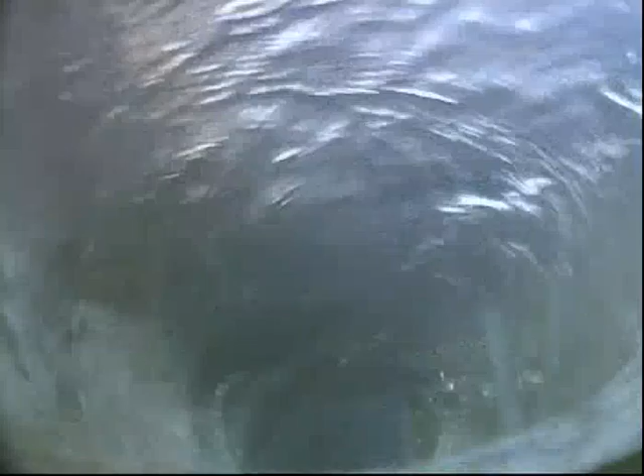Fascination water. No other natural element is so inspiring, mystical, destructive, and healing. At the same time, it's an indispensable source of our survival.

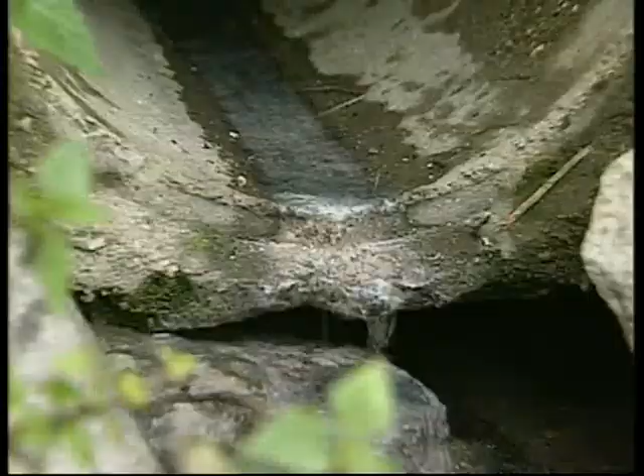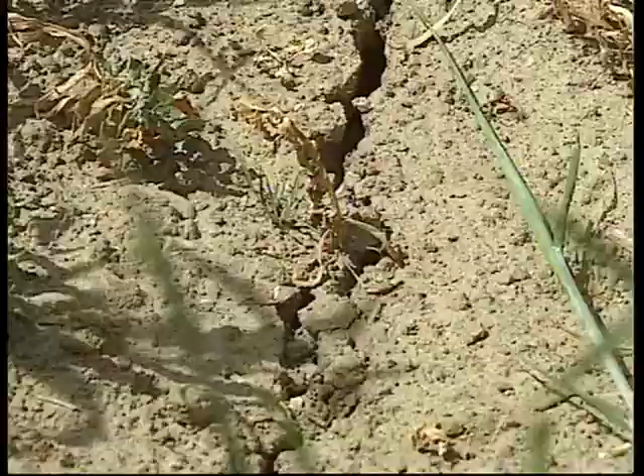Even in apparently water-rich countries such as Germany, the first harbingers of climate change are already recognizable. Dry summers and low precipitation winters have led to a drop in the groundwater table, especially in the northeastern part of Germany.

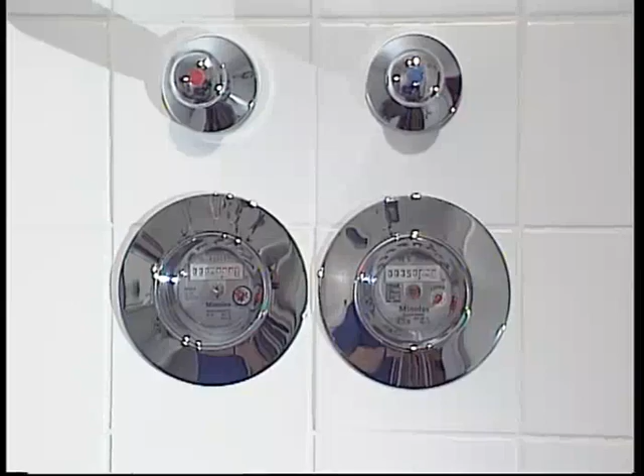Awareness raising aimed at a more conscious and responsible handling of water was needed. The avalanche was set in motion with the water meter. There's hardly a single household where a water meter is not installed, showing accurate drinking water consumption and urging its owner to save water. Dripping water taps are already a thing of the past.

In spite of increasing luxury in the bathroom, an efficient handling of water has become a matter of course for the majority of Germans. The industry reacted hesitantly at the beginning, but later complied with the demand. By using different water-saving fittings, water as well as energy consumption can be reduced almost by half.

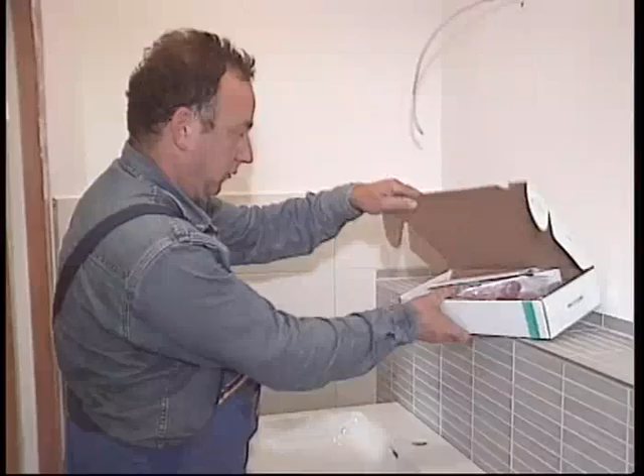Today, more homeowners and investors are becoming aware of this fact, and water-saving fittings are being already installed in new constructions or during the retrofitting of old buildings. Flow restrictors, which deliver only 3 litres per minute, will also achieve a similar effect in old fittings. This investment will pay off after just 1 month.

Water can also be saved during toilet flushing and laundry activities. While washing machines consumed 160 to 180 litres of water in the past, they require less than 50 litres today.

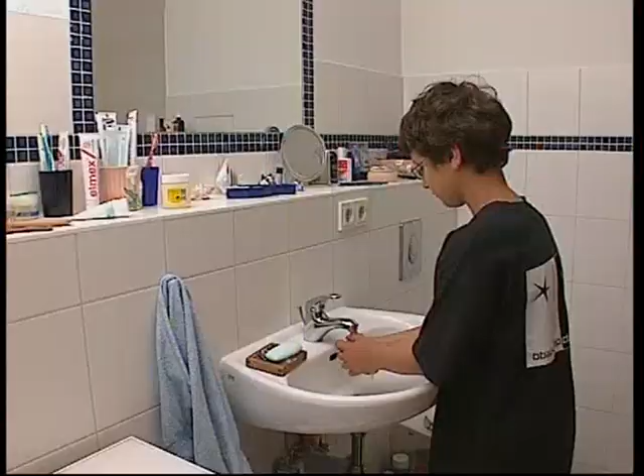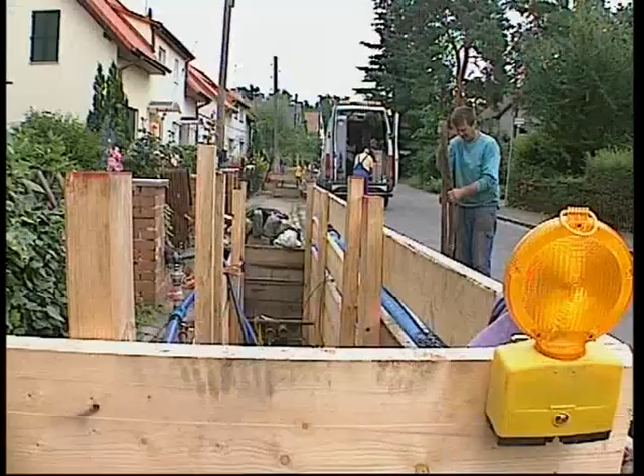At the same time, water and wastewater costs have been increasing by twice as much as energy costs, an ongoing trend. The share of the fixed cost for the infrastructure lies at about 80% of the drinking water and wastewater cost. The largest share of costs will be needed for maintaining and rehabilitating the almost 100-year-old ailing supply networks, for drinking water and especially those for wastewater disposal lines.

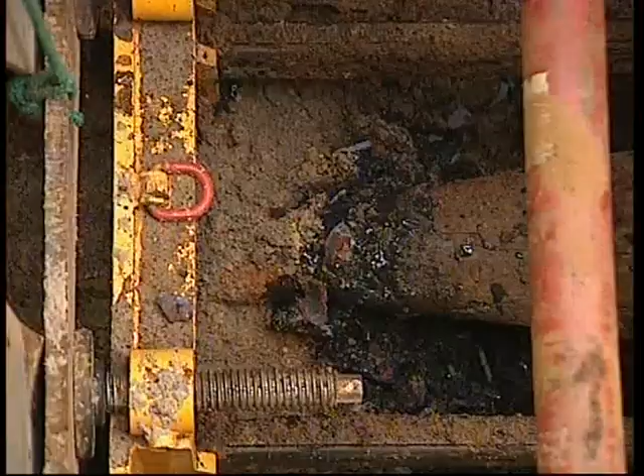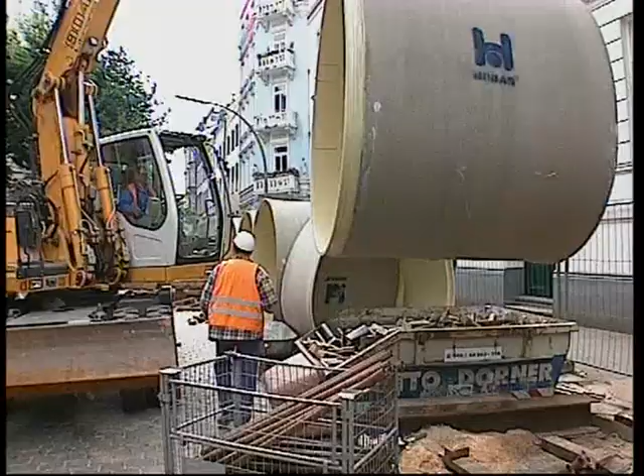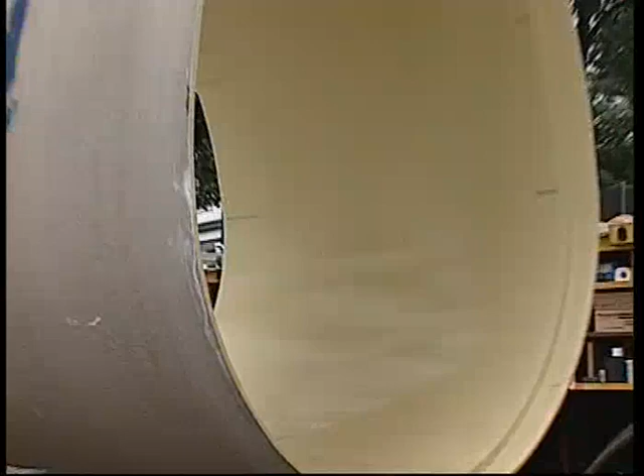Experts estimate the rehabilitation demand for the coming years, especially for the sewerage system, at 50 to 60,000 million euros. This corresponds approximately to the value of the gold reserves in Germany's central bank, funds which many of the municipal water companies don't possess. Furthermore, these centralized systems are not flexible enough to deal with the rapid population change.

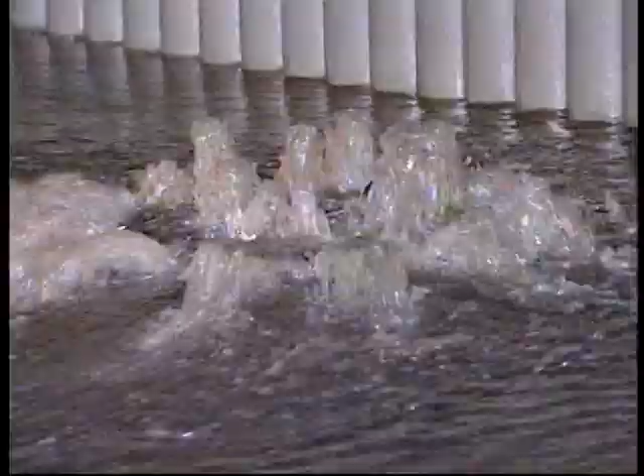In addition, there are problems related to incipient climate change. For example, more frequent precipitation has resulted in floods in recent years. On top of everything, an increasing number of torrential rain events invariably caused major problems to the German combined sewerage system, into which rainwater and wastewater flow together, so that a fraction of the rainwater-wastewater mixture flows untreated into rivers and lakes following heavy rain showers.

Fish die as a result of oxygen depletion in water bodies due to bacterial decomposition of the wastewater components. Bathing sites and lakes often have to be shut down in summer due to high microbial load. On the other hand, exceptionally long dry periods hinder groundwater recharge and have fatal consequences on forestry and agriculture.

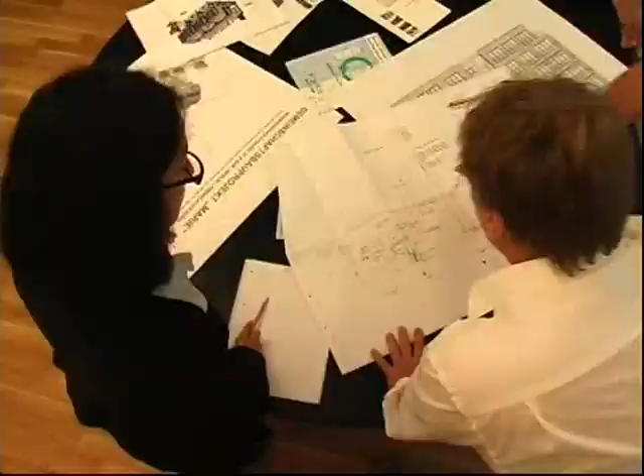Also in Germany, there are already regions with deficient amounts of water. Local authorities, planners, architects and engineers need to work together to implement new decentralized water concepts. These are more economical and above all more adaptable to climate and population fluctuations, closing eventually the water cycle.

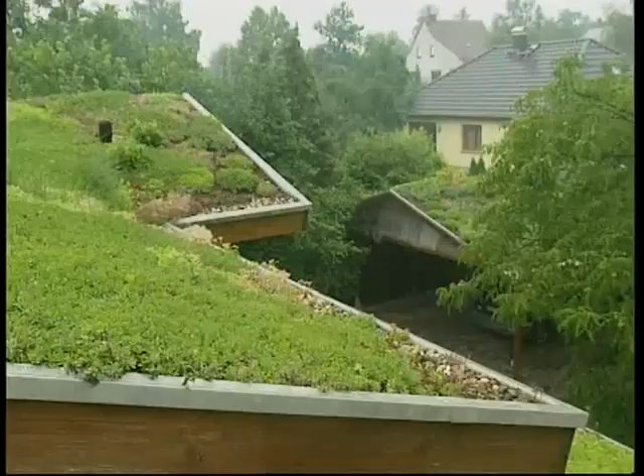Rainwater can be simply utilized by means of evaporation or infiltration on site, relieving at the same time the strain on the municipal sewer. Green roofs in housing settlements in rural areas or in urban multi-storey buildings offer excellent options for rainwater management.

Various types of grass planted in the inner courtyards between paving stones instead of concrete surfaces are also suitable. Or even storage reservoirs which collect roof runoffs. Runoffs can also drain in constructed wetlands, as seen here in the middle of a city of 1 million. Or, upon heavy rain, runoffs can seep into the underground via an adjacent vegetated swale. Recently, scientists have continuously shown the high value of such measures for the microclimate, especially in large cities.

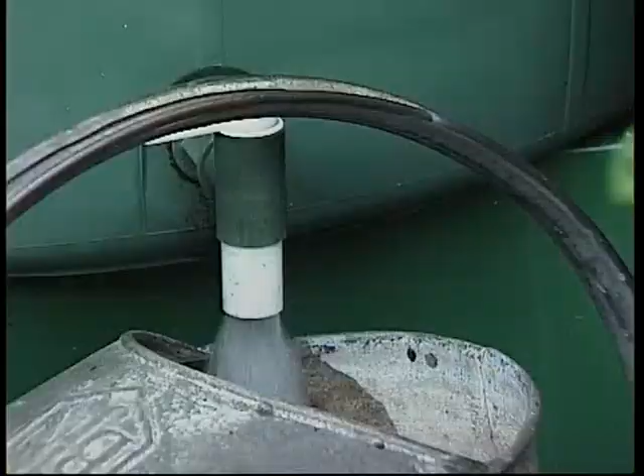The good old rainwater barrel has also been rediscovered as a water reservoir for the garden. Also, surface runoffs can be used directly to water the flower bed.

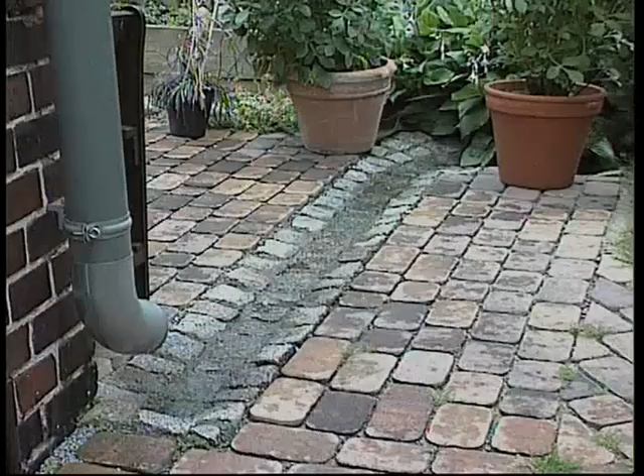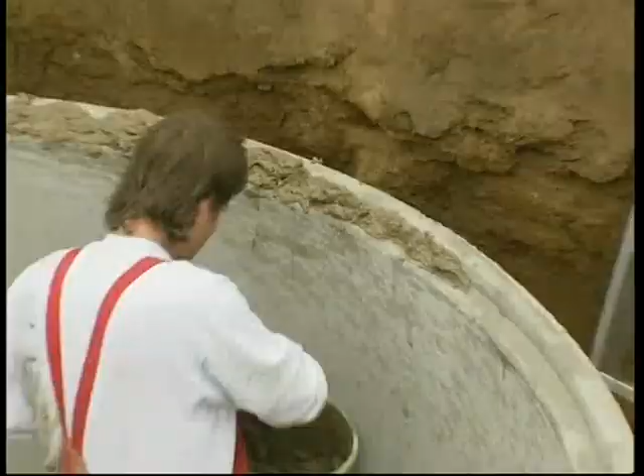On a larger scale, there are several modern technologies which can help increase the rainwater potential. In Germany, about 50 to 60,000 rainwater cisterns are built yearly, either from concrete or plastic, and the trend is upwards.

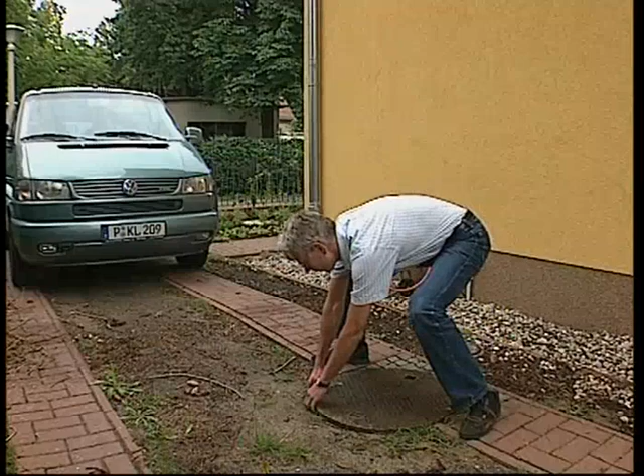The Darker family deliberately implemented rainwater utilization in its 3-generation house in Potsdam. Roof runoff drains directly into the 6,000-litre cistern. A storage capacity of about 700 to 800 litres is calculated per person. A filter, which is easy to clean, retains the coarse solids in rainwater.

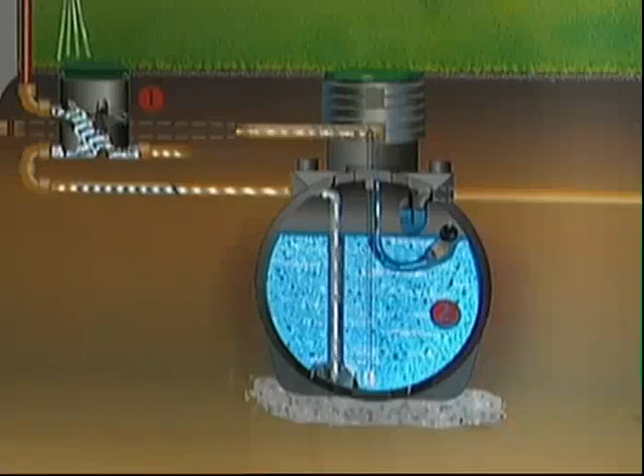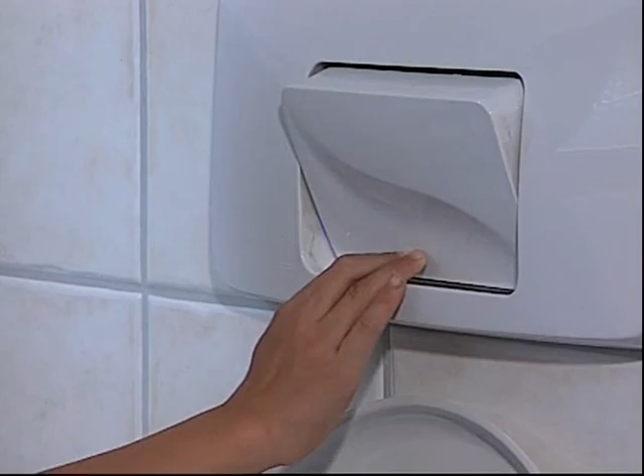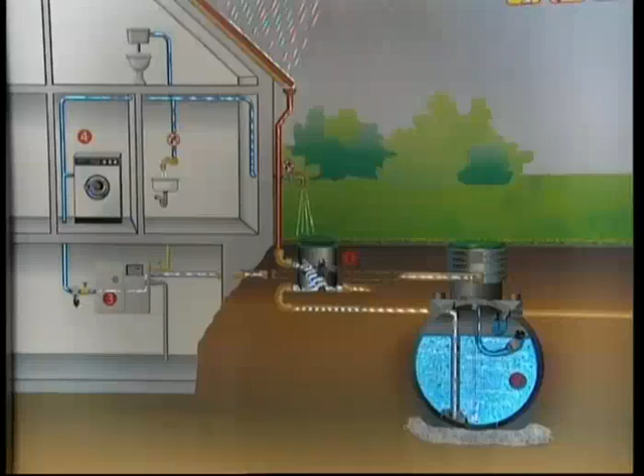Rainwater is withdrawn from the cistern over a separate second network, by means of automatic control, to the different floors for use in toilet flushing, laundry, and garden watering.

We have no concerns as to the presence of any residues in rainwater, or whether it is not clean enough for laundry. During dry periods, we turn off the washing machine and use rainwater only for toilet flushing or to water the garden.

The Darker's rainwater system will pay for itself within 5 to 6 years. Eventually, a third of the yearly total drinking water and wastewater costs can be saved through rainwater utilization.

For the Hamburg Hotel Ausspann, rainwater utilization has already paid off. The architect and hotel owner constructed a collection tank in a vacant room inside the building, between the stairs and the guest rooms.

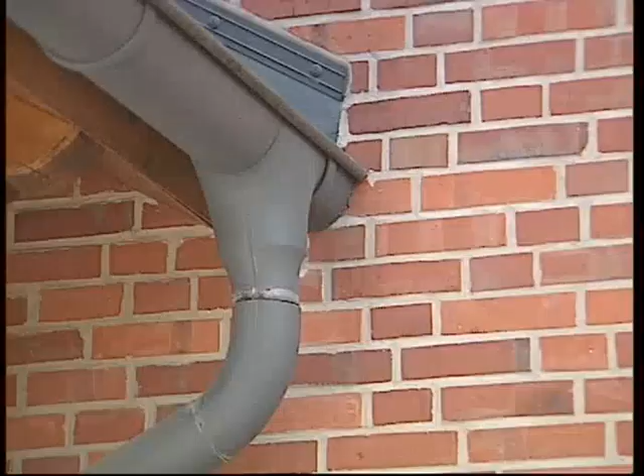It works for 13 years, and we have already collected about 4,000 cubic meters of rainwater. We mainly use it to flush the toilets of 40 water closets connected to the system.

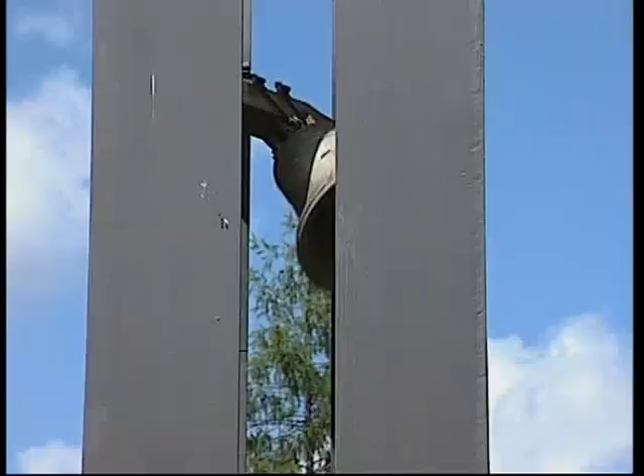Great benefits have been achieved in other projects in Berlin, such as that of the Franciscan monastery, where laundry for the charity shop is washed with rainwater. This is profitable, since the wash water can be treated again and used for toilet flushing.

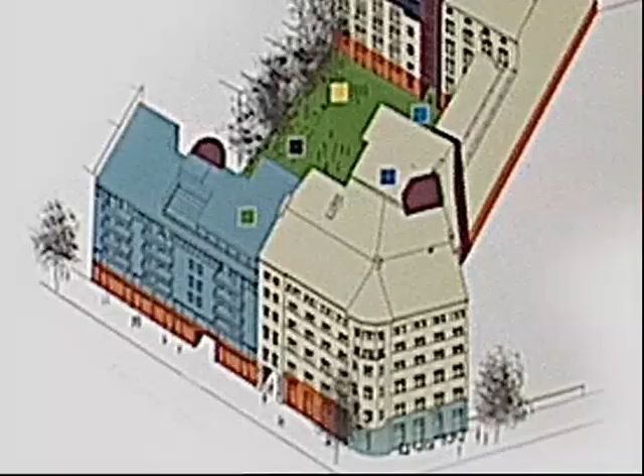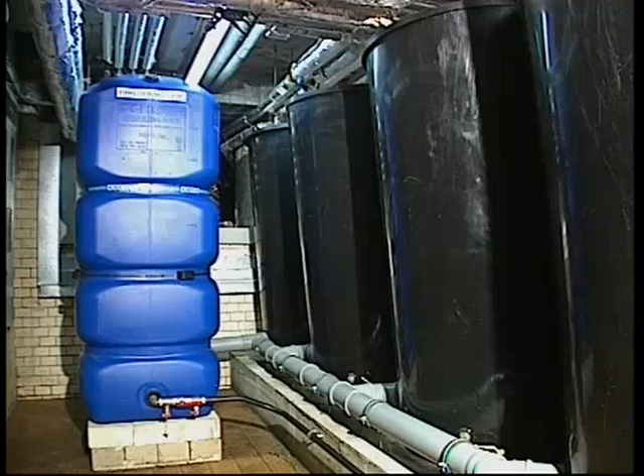This is the Weiberwirtschaft, a business complex for women in the centre of Berlin. Here, 3 rainwater plants store up to 80% of the rainwater for use in toilet flushing in the different trades, including a tailor's shop, glazier's workshop and a restaurant.

These projects have achieved that new effective technologies were developed and tested in Germany. We also developed guidelines for construction, planning, operation and maintenance of these plants. Our technologies have also proved to be of value worldwide.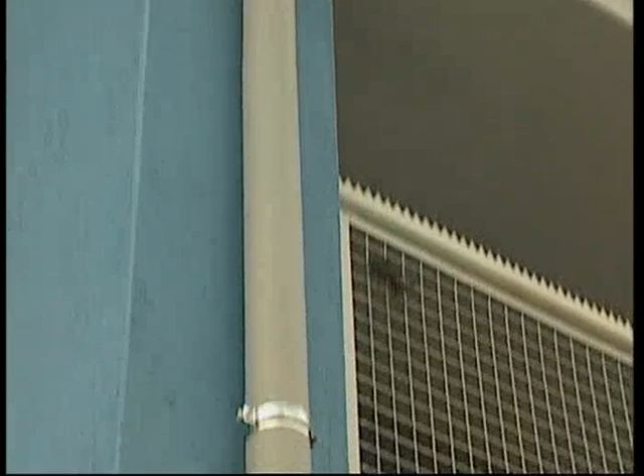Another famous water-saving project is that of the Technology Centre of the Fire Brigade in Hamburg. Rainwater from the flat roof flows through downpipes into which filters are integrated, and drains into plastic tanks placed in the cellar. From there, rainwater flows by means of centrifugal pumps into a washing plant.

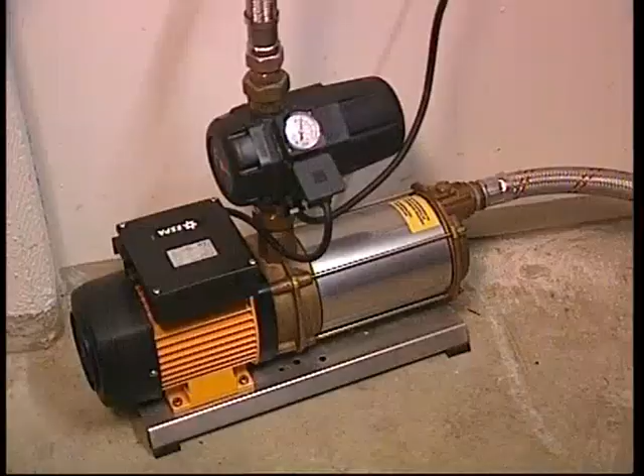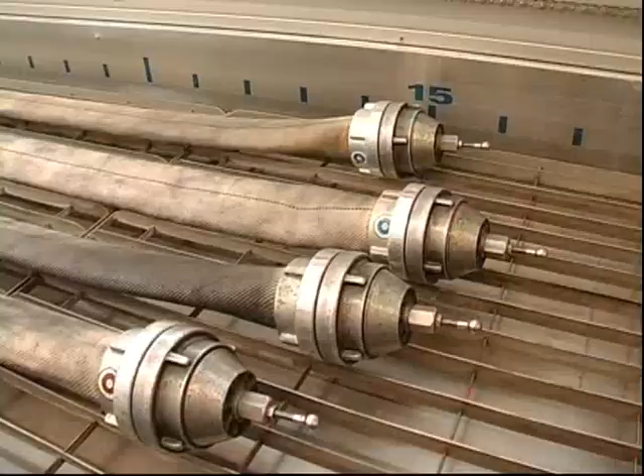Here, all the fire hoses of the Hanseatic city are cleaned regularly. 4 fire hoses can be cleaned within 20 minutes, including drying and a pressure test.

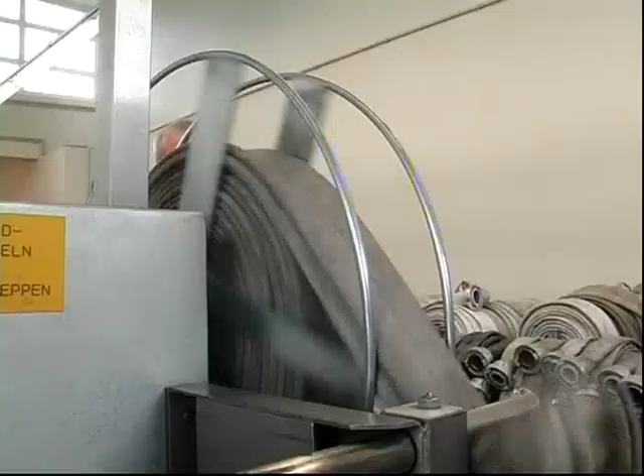The yearly water bill of €13,000 uncovered the largest water consumer of the centre after a comprehensive examination. Up to 500 cubic metres of drinking water can be saved yearly through rainwater utilisation, thus reducing running costs.

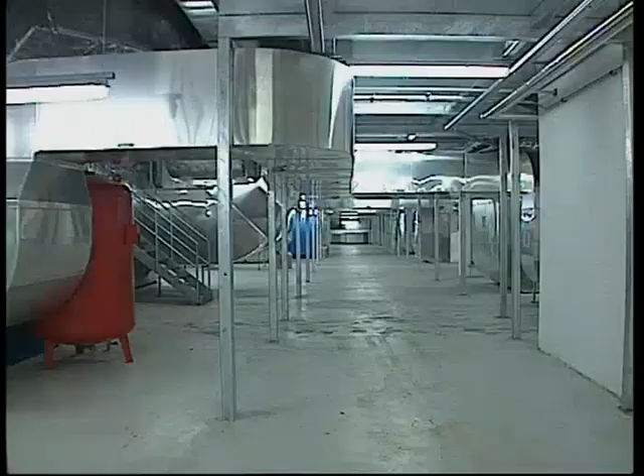Even more rainwater can be collected from the roof of the Hamburg airport, which is stored in an underground reservoir 12 metres below the surface, behind the central ventilation system. From there, rainwater is pumped to all airport toilets.

We feel ourselves committed to conserve these resources, and this has been the major driving force. And of course, after a rough calculation, it was clear to us that this would turn out to be profitable. €22,000 can be saved yearly using rainwater.

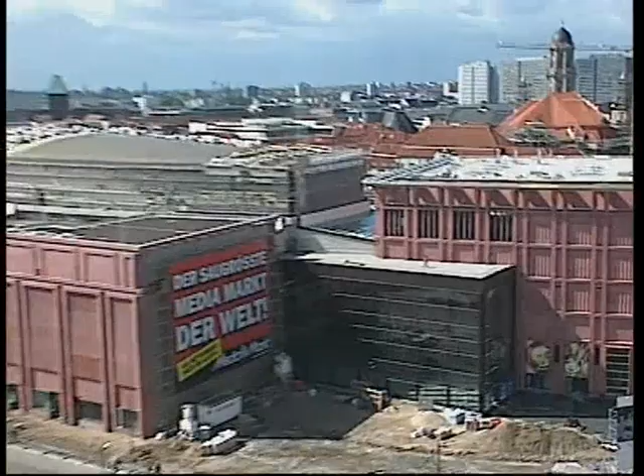Therefore, in almost all modern large airports in Germany, these water reserves are being tapped. Also, renowned shopping centres are increasingly resorting to rainwater utilisation as a substitute for drinking water.

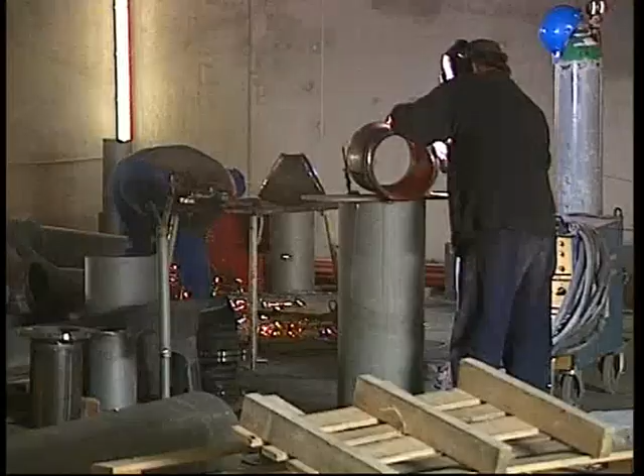A current example is Alexa of Sonae Sierra in Berlin, which is still under construction. The firm is internationally recognised as a specialist in shopping centres and owns 44 of them in Europe alone. It's also well known for its environmentally friendly design, operation and management. A short visit to the future rainwater reservoirs.

We are able to collect about 1,050 cubic meters of rainwater with the 2 reservoirs. We will primarily use this water for cooling, to feed the air conditioning system which we have installed in the shopping center.

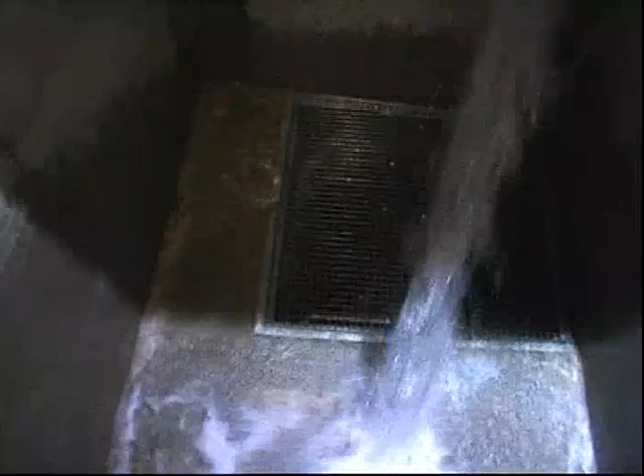The concrete basins will be eventually flooded. The stored rainwater is also connected to a sprinkler system and can be immediately used as reserve water for firefighting.

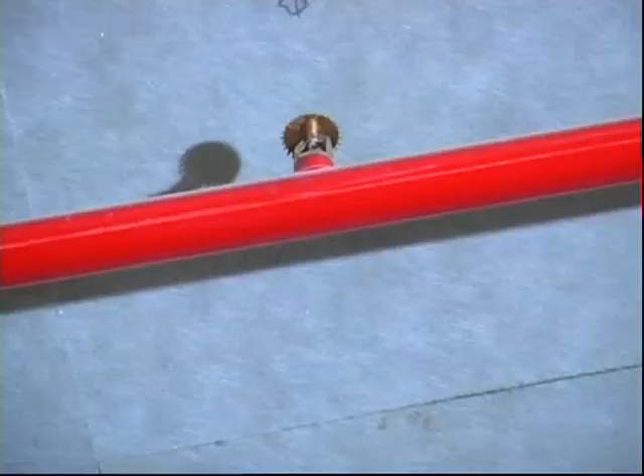The next rainwater reservoir holds almost 1.5 times more than that in the shopping centre's reservoirs, which happens to be the largest rainwater reservoir in Europe with a built-in sand trap.

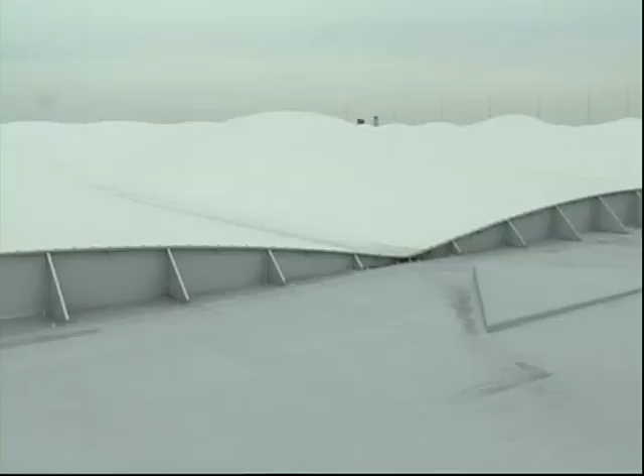Rainwater falling on Berlin's Olympia Stadium flows largely from its highly corrugated roof surfaces into an underground reservoir, which is then used for irrigation of the sports fields and surrounding green space.

On a hot summer day, about 120 cubic metres of irrigation water is needed, corresponding to about 15 to 25 litres per square metre. As such, lawn maintenance is a very sensitive issue, to be carried out by experts only.

Rainwater is a natural system, which is, of course, free of charge. It contains no chemicals and is distributed evenly on the plant.

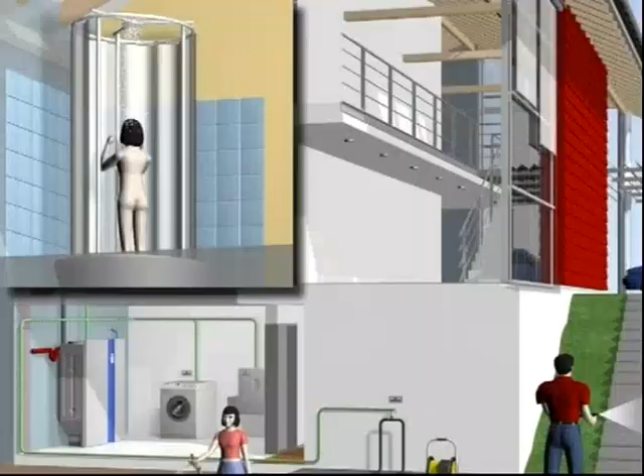Water from the shower or bathtub flows over a separate second pipe network into the biological mechanical treatment system installed in the utility room. The grey water is treated in several stages.

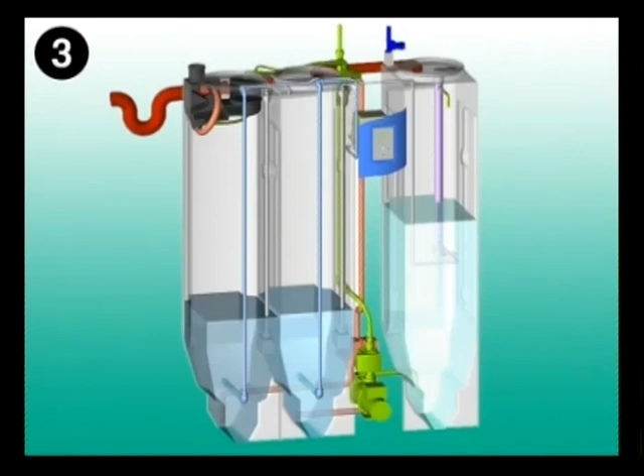A special filter retains coarse material such as hair and lint. Bacteria which grow on the carrier material enhance the aerobic decomposition of the grey water components. A UV emitter gets rid of the rest of the germs and clear water is made available for use.

The water is not suitable for drinking purposes, but for toilet flushing it's adequate by all means.

This is also what the 30 inhabitants of the newly restored former fish smokehouse in the middle of Hamburg think. We built a grey water recycling plant 20 years ago. It has been more like a do-it-yourself thing, and from today's perspective the maintenance expenditure was high.

5 years ago we installed this plant from the firm Pontos. This system requires little maintenance, but it is good to have a look at it now and then. We save €900 on drinking water costs, and this is a real success.

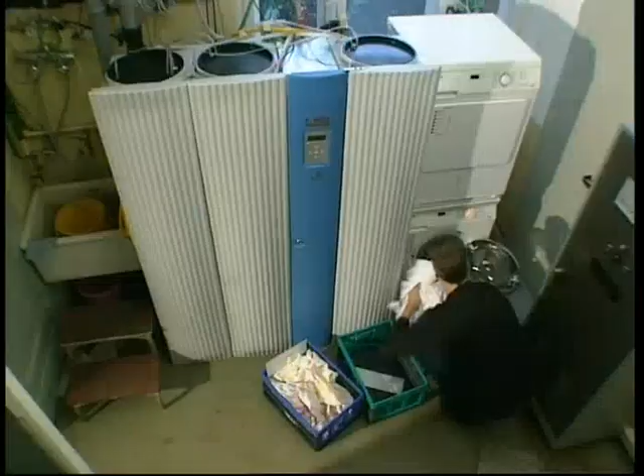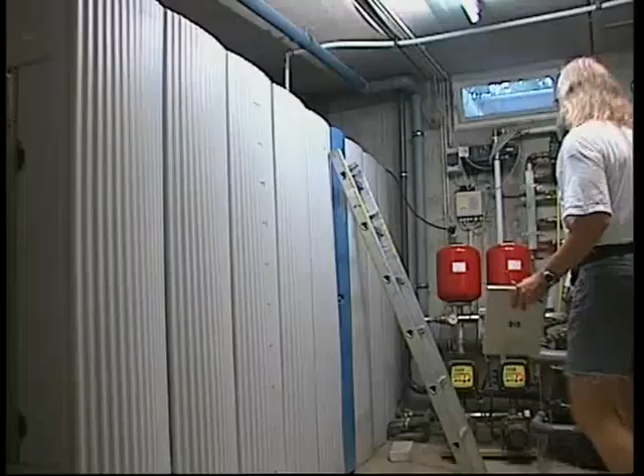Researchers at different German universities have shown that recycled grey water is like rainwater, hygienically sound and as such can be used for laundry. Due to the modular design, the single modules of the so-called aquacycle can be varied depending on the amounts of generated grey water.

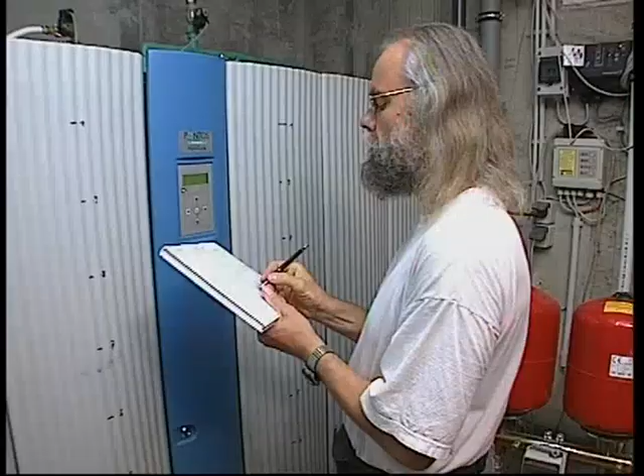Larger systems are more profitable. Take, for example, the one seen in this cellar. With this system, 1,500 to 2,000 litres of shower water from 19 houses are treated daily.

800 recycling cabinets have been delivered to date by Pontos. Two thirds of them were delivered within Germany, and the remaining went to Western Europe, North Africa, Australia, and even to the Cape Verde Islands and the Maldives.

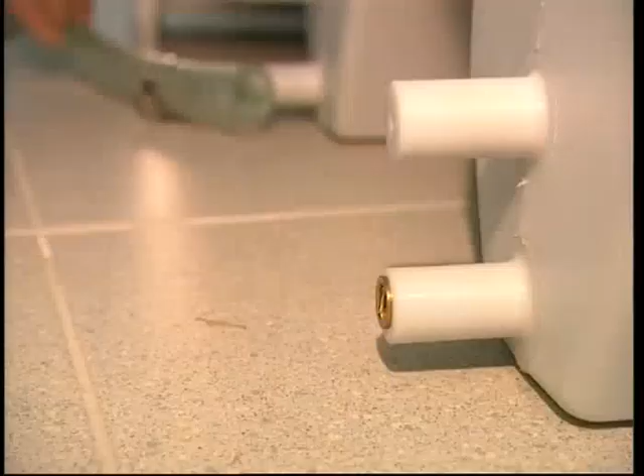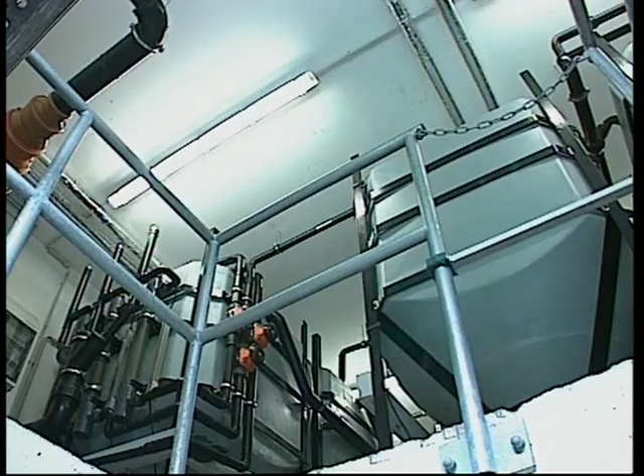Hamburg's Municipal Refuse Disposal Service has one of the largest grey water recycling plants in Germany. It treats the water from 32 showers and hand wash basins and stretches over 2 stories high. The principle of this large plant is similar to the smaller one for a one-family house.

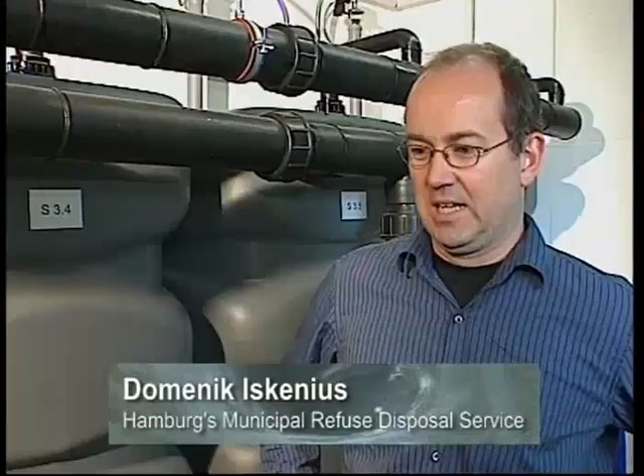We have a total capacity of 21,000 litres. The tanks for grey water treatment are found in the upper area.

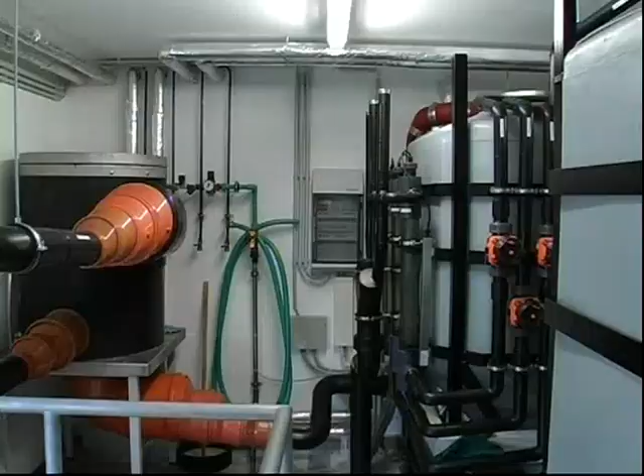At the beginning, coarse filtration takes place. When grey water passes through the different stages, it is collected here. About 6,000 litres of service water can be stored.

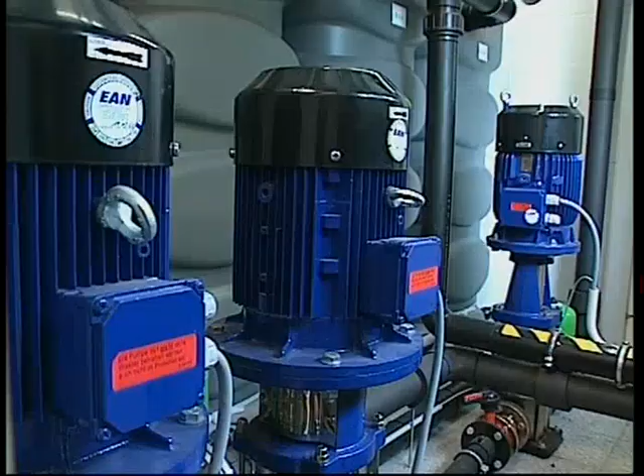The noise you hear in between comes from the pumps which transport water either to the road sweepers found outside or to the toilet flushing tanks.

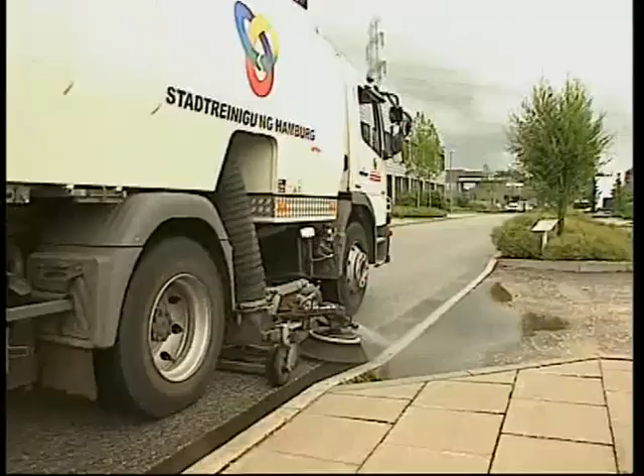The road sweepers function properly without any problems. The nozzles do not clog, as is often the case with rainwater in which sand is trapped, or with well water which contains iron or manganese.

Treated grey water from the showers is also used to dilute the de-icing salt solution for the winter road clearing services. The profit is just enormous.

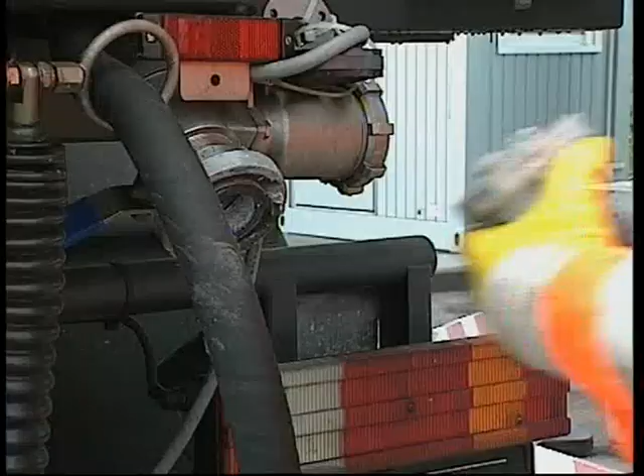After all, about 2 million litres of non-potable water are produced by this plant.

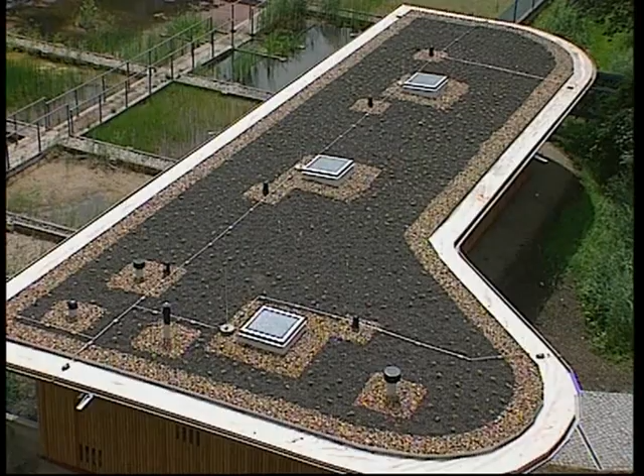In this blockhouse in Berlin, the newest grey water recycling plant has just been completed in summer 2007 for the whole residential complex. The existing water concepts from the 19th and 20th century are not able to solve the upcoming problems of the 21st century. The goal should be to produce as little wastewater as possible. This is achieved here with grey water recycling.

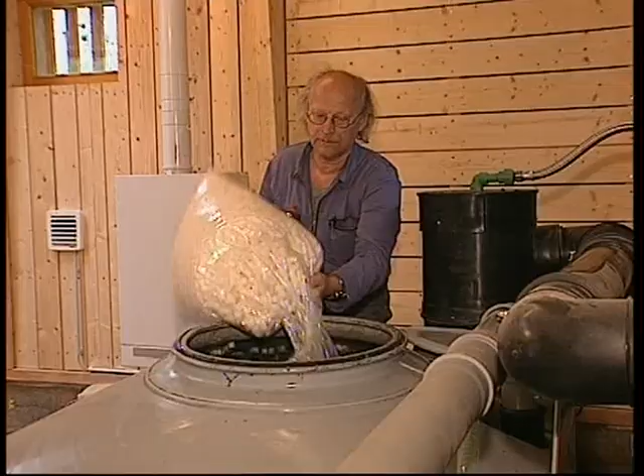Besides grey water from bath tubs, showers and washing machines, the more polluted grey water from kitchens is also treated for reuse in toilet flushing by 250 residents. A very promising research project initiated by scientists and industry, whereby bacteria which settle on these foam cubes can proliferate vigorously.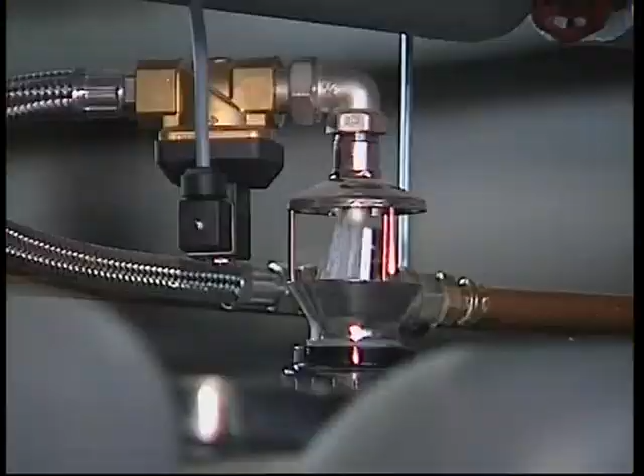A backup system which may supply drinking water or rainwater through a separate network can be used to cover the demand when needed.

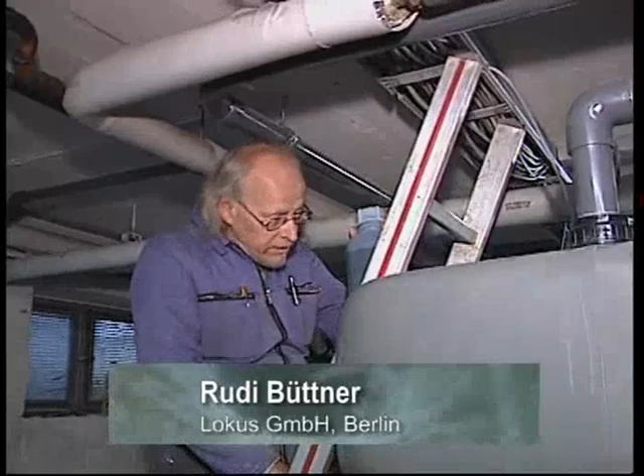I am going to add some food dye to our service water tank in order to test the pipe network systems and exclude any cross connections.

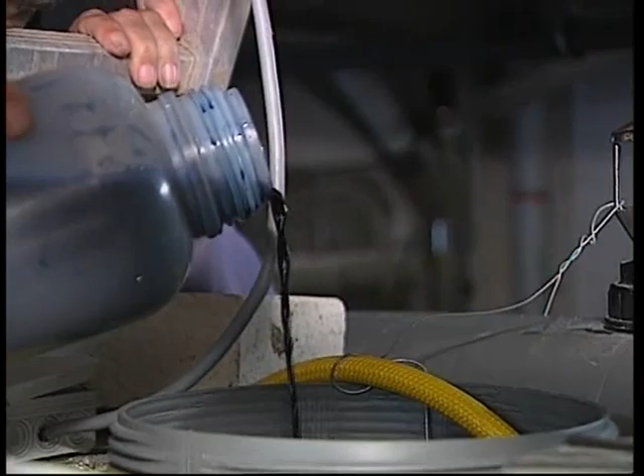So let's see if all has been properly installed. I flush, and here the blue water comes out. This is our service water.

Now we move to the wash basin. Here no blue water should come out, neither on the warm nor on the cold tap side.

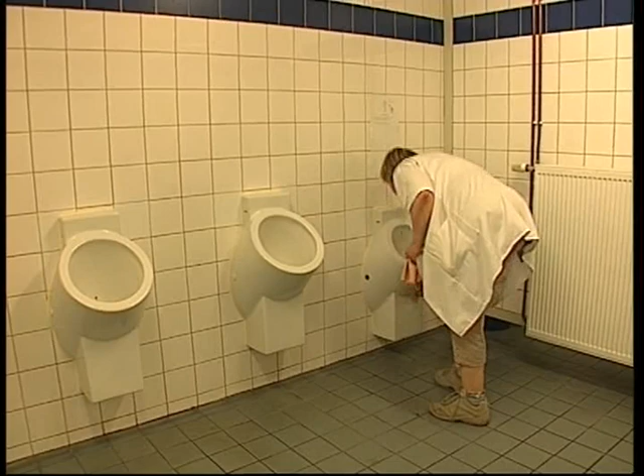They've been seen in Hamburg for a long time, waterless urinals. Over 4,000 of them have been installed in public buildings in the last 10 years. Their principle goes back to a Vienna patent from 1885.

The Senate Department of Environment helped foster acceptance of the system by promoting a new membrane technology. This is a small tube which opens under the pressure of urine and closes when no water or liquid arises.

Through urine separation, Hamburg not only saves 22,000 cubic meters of drinking water a year. Urine makes up only 1% of the total wastewater. However, it contains high-grade nutrients which cannot be collected in spite of modern wastewater treatment plants.

Phosphates and nitrogen can still pollute the water bodies. We want to try to strike out in a new direction in sanitary engineering by extracting these contaminants beforehand.

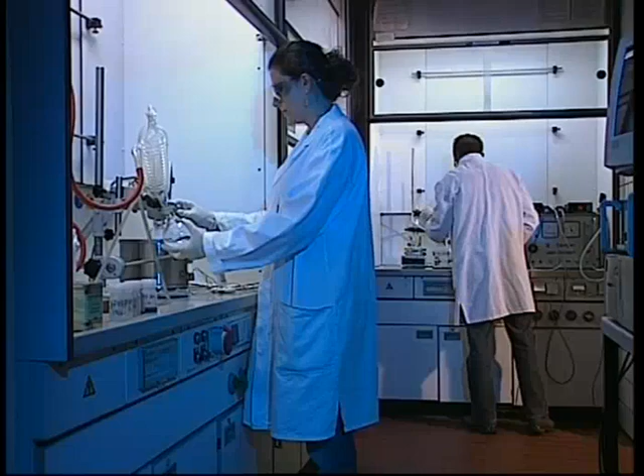At the Institute of Wastewater Management and Water Pollution Control at the Technical University of Hamburg, scientists are on the right track to win high-grade fertilizers using different technologies.

Today, there are several developments in many parts of the world on urine separating toilets, where urine is collected and utilized immediately, as in the case in China with already 1 million installations. Basically, we want to build up an industry which produces a dry fertilizer from urine that will have high-quality standards.

In more housing developments in Germany, such as in Hamburg-Allermöhe or here in Schöneiche near Berlin, residents already produce their own fertilizer for the garden by means of compost toilets.

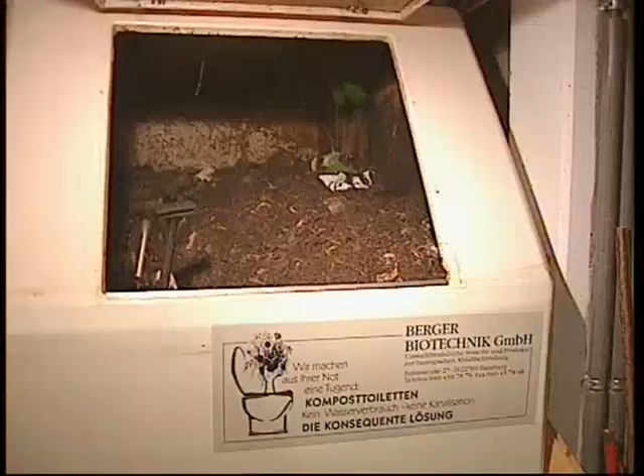In addition to human excrement, kitchen and garden waste travel down 1 to 2 levels into the compost container where they undergo microbial decomposition. An exhaust pipe directly connected to the roof and boosted with a ventilator provides the required oxygen and ensures an odour-free operation.

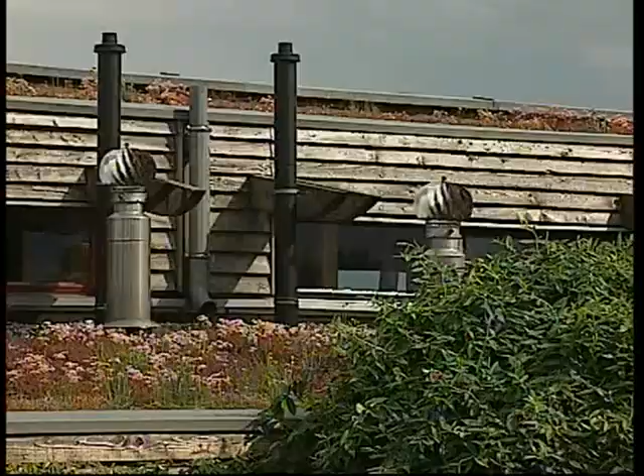After 2 to 3 years, the finished compost can be removed, a rich brown soil which smells like forest earth. Most of the families were very enthusiastic about this ancient toilet principle for their modern houses.

When we bought the house, we were not aware of the presence of a compost toilet. At the beginning, I was a bit skeptical as to whether I'd get used to it. Today, I must say, I find it wonderful, and the benefits prevail.

Many families have been extremely creative and have decorated their draining pipes beautifully.

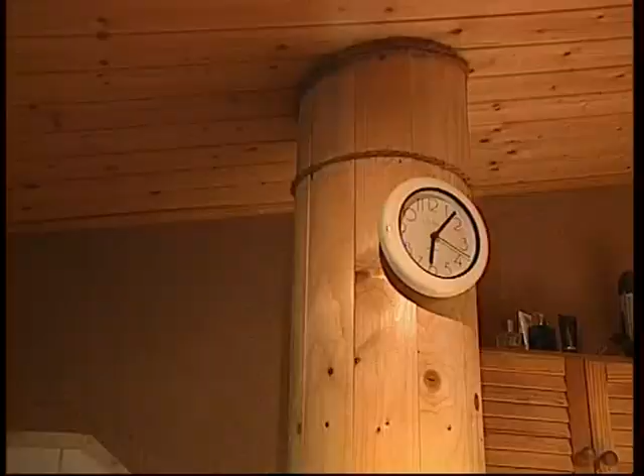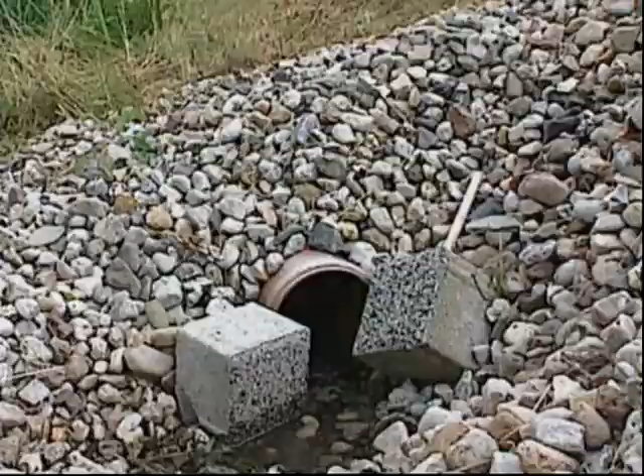Wastewaters from showers, washing machines and dishwashers are treated in a constructed wetland. Wastewater is discharged through a pipe system in 2 stages. The first in the reed bed, which is seen here behind us. And after its passage through the gravel filter, the treated water is infiltrated in an infiltration ditch.

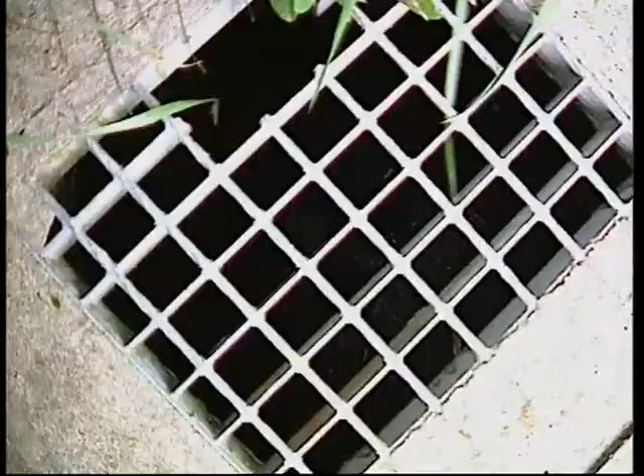In spite of the high costs for the planted soil filter, including infiltration, such a decentralized disposal pays off after 5 to 6 years, since no wastewater is generated and less drinking water is consumed. Thus, it's an investment in the future.

Such an investment was also profitable for the Lörs in Hamburg-Bergedorf. They constructed their house 10 years ago from a run-down greenhouse, with a compost toilet and a constructed wetland and no connection to the municipal sewer. The shabby greenhouse was converted into a blooming oasis.

A successful experiment which is worth emulating in other areas in which greenhouses would otherwise cease to exist sooner or later.

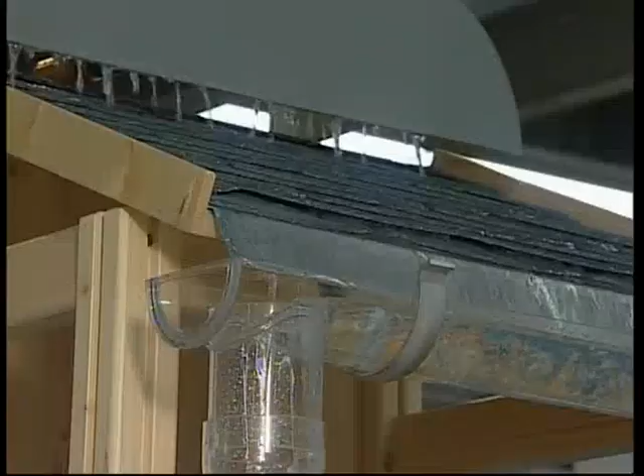International trade fairs show it over and over again. The new decentralized technologies are fully developed. They offer large benefits even for countries with a still deficient water infrastructure due to their greater flexibility and lower costs compared to centralized systems.

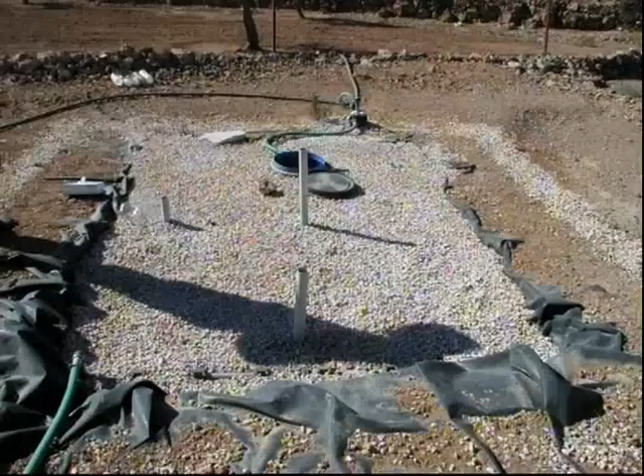With its Zero-M project, the European Union promotes the implementation of these sustainable water concepts in the Mediterranean countries. With them, the worldwide upcoming water problems can be mitigated and the remaining resources conserved.